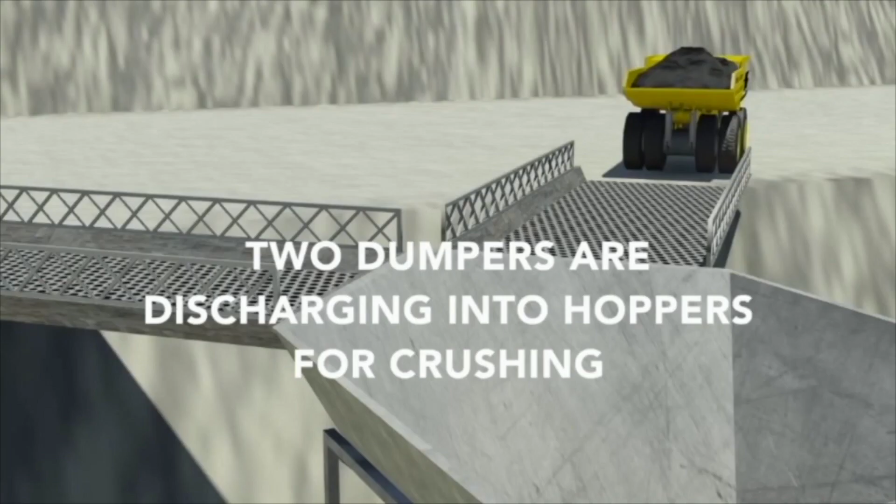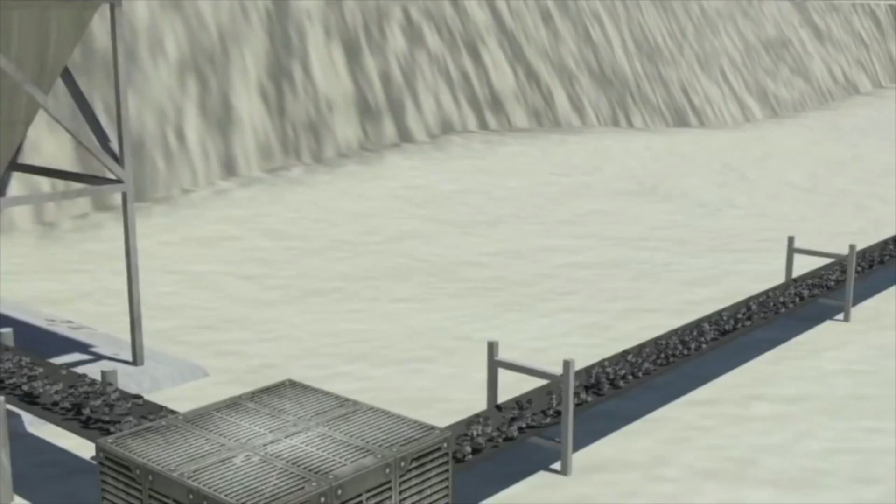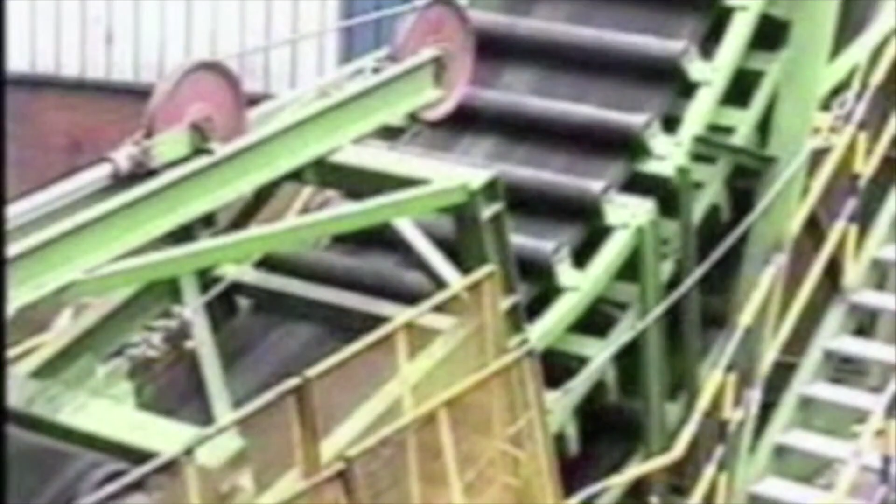So now we are showing the concept of in-pit crushing and the high angle conveyor for transporting coal to surface and then carrying coal through overland conveyor to washery. So now coal is being discharged onto the high angle conveyor. This is the top belt, and both top and bottom belts are sandwiched and the material is in between.

We are showing how the snaking is being done between top and bottom belt to hold the material within the belts. So this is the snaking arrangement, and then the coal is taken to the top, and it is being discharged from the high angle conveyor onto the overland conveyor, and this is the in-pit crusher at the pit bottom. So this is the concept, and this is the proposed layout for Kathara; with Google we have drawn the layout.

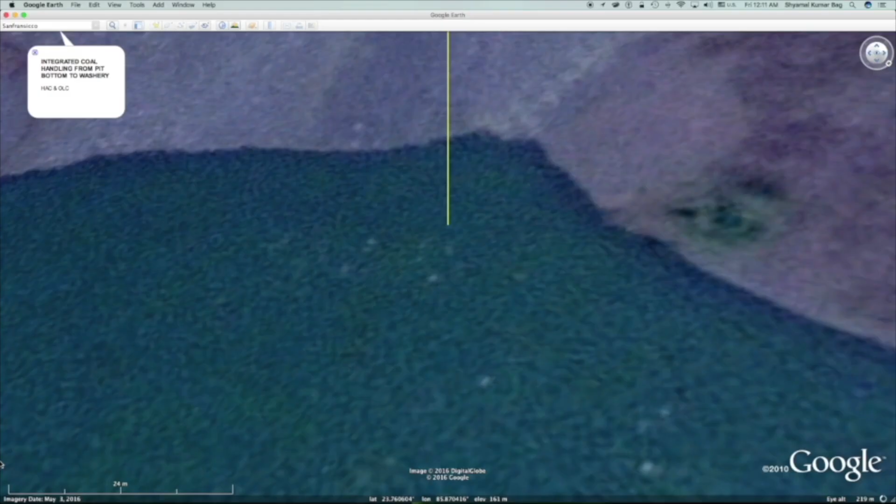So we are showing how it will come from the mine. Here this is the mine, this is the yellow line, coming from the mine pit bottom through this yellow line to the pit top, and at this point there will be a transfer hopper, and this is the overland conveyor which is taking coal to the crushing part of the washery, and the total route length is something like 620 or 630 meters. So this is how the high angle conveyor is going, and then through the overland conveyor it is reaching the washery. We have drawn all these things on Google.

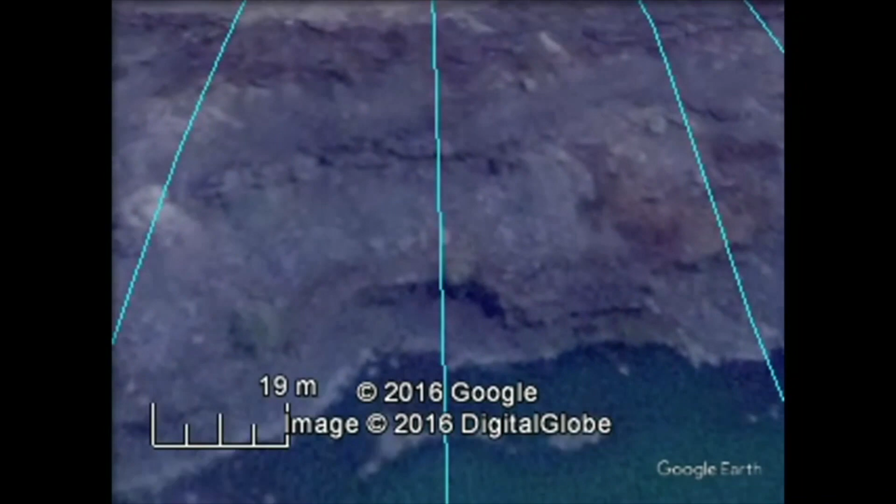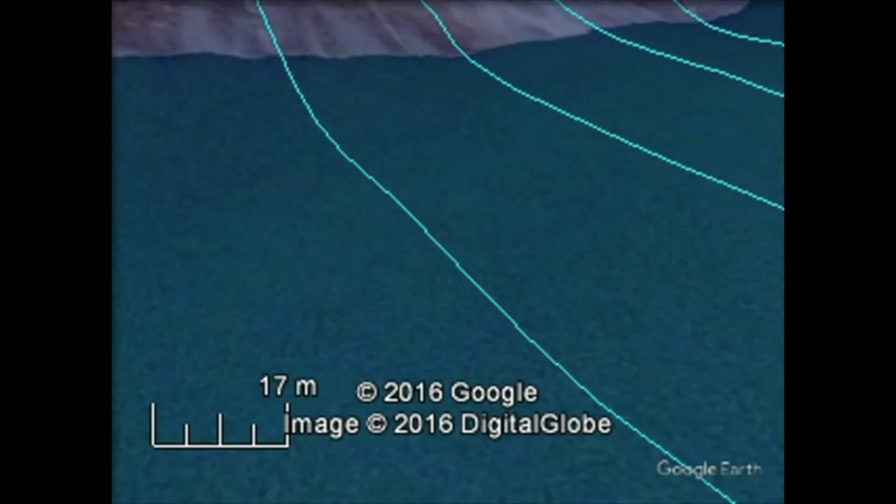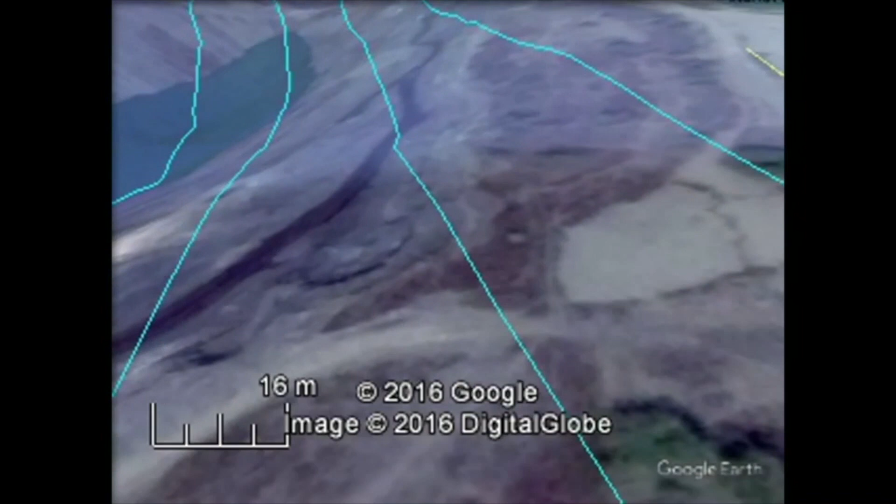This is the contour grid we have also plotted. This is how the contour is going from the top. This is the water level. The mine will go a further 50 to 60 meters below the present water level. So this is again coming onto the water and again going up. We have drawn this to plot the contours. This is the haul road at the surface. This is the inclination of the haul road, which is very risky. This is the contour we have generated.

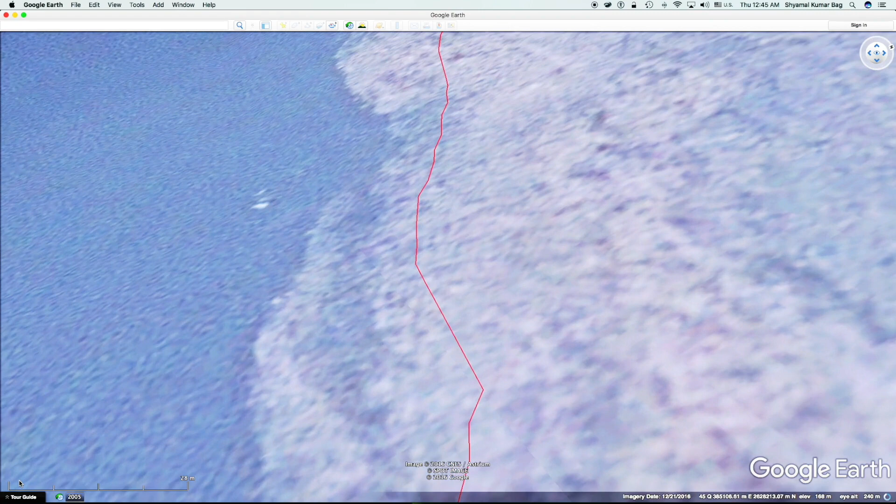Now we are showing the present alternative of dumper transport from the mine. This haul road is imaginary because now no dumper is plying, but we have simulated the situation; it will be something like this. So here at the surface, this is the existing haul road through which the dumper shall move. This yellow line is the high angle conveyor route, and this is the existing haul road. This is the point where the HAC is crossing the dumper road.

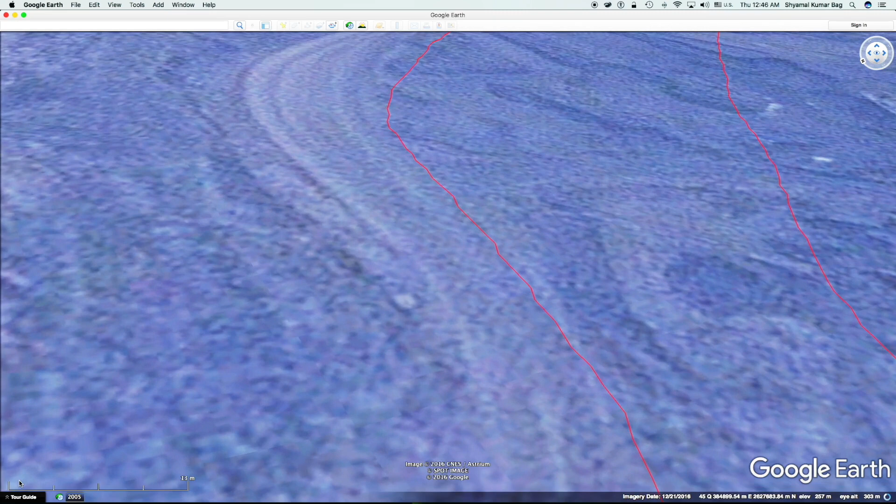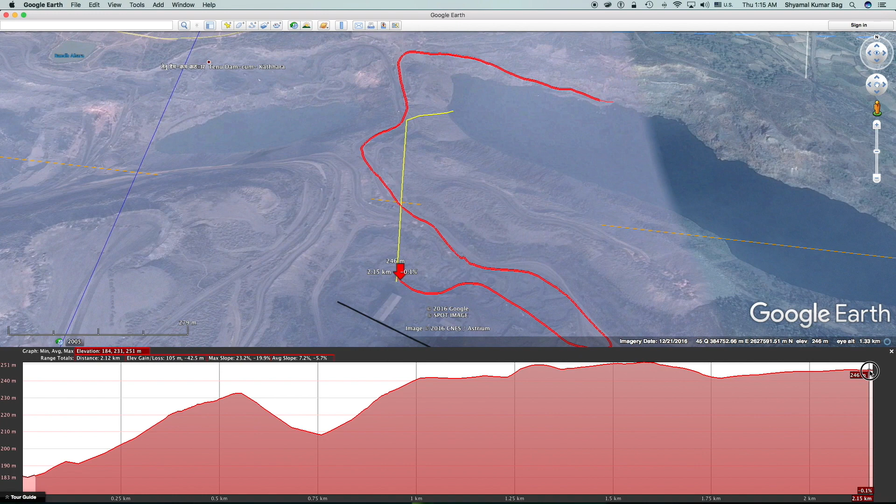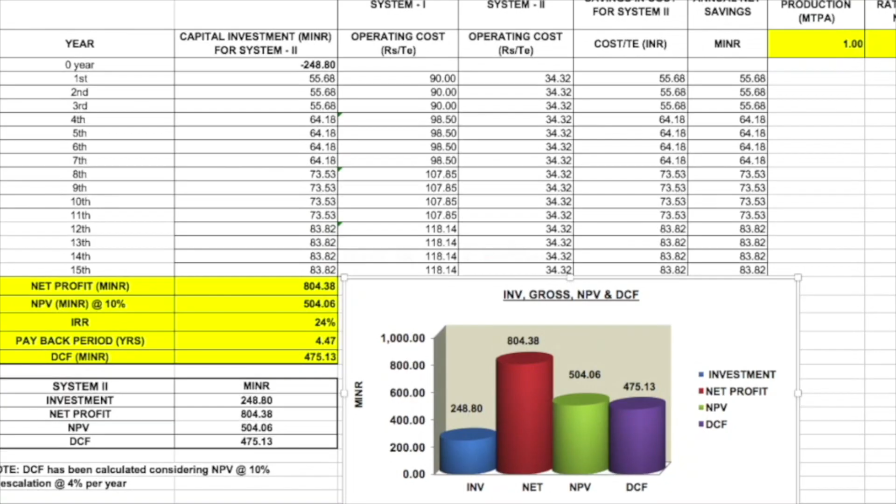The dumper is going, it is approaching the washery. Now it is entering the washery gate. Then the dumper is carrying coal to the depot near the crusher where it will be crushed. And this is the elevation level and the total route length of the dumper. Practically, this dumper route length will increase with the increase of depth. Now this total distance is something like 2.5 kilometers. So for the HAC it is 620 meters, whereas for the dumper system it is 2.5 kilometers. So it is almost one quarter.

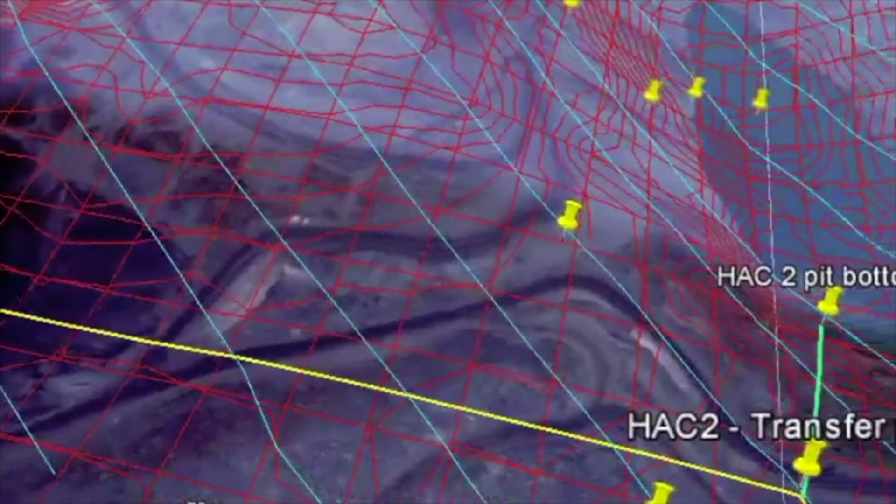So these are the various economic calculations and evaluations we have done in a separate report, and this is another concept we have shown. It is possible to bring the coal from the central sector mine also to the same point, and the entire coal can be transported by overland conveyor. So green is the HAC from the second mine and yellow is the HAC from the eastern sector mine. The entire contour has again been taken to Google. This is the eastern sector mine, this is the high angle slope.